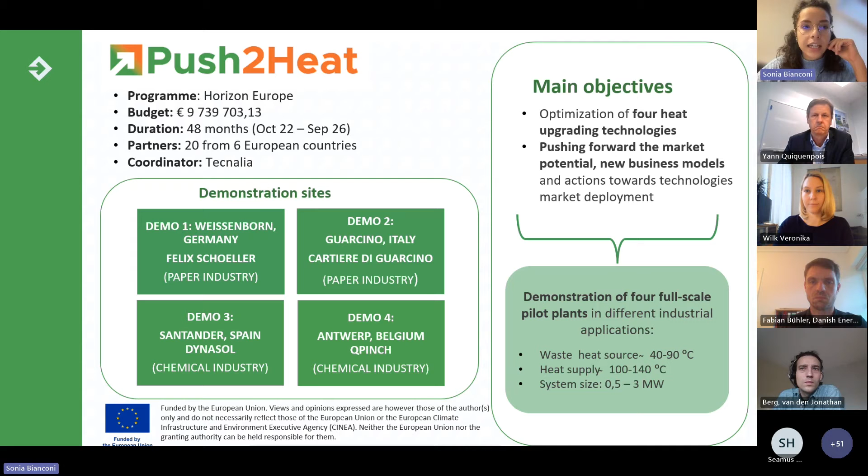I'm happy to tell you that this webinar has been organized under the framework of two Horizon Europe projects that aim to foster industrial heat pumps in Europe. These two are called Push2Heat and Spirit. They both kicked off last year, and EHPA is partner of these two projects. So we have Push2Heat, whose main objective is to push forward the deployment of industrial heat pumps at EU level, and it will do so by demonstrating four different technologies in four different demonstration sites, two in the paper industries and two in the chemical industries. It has a duration of 4 years, and it counts 20 partners from 6 European countries.

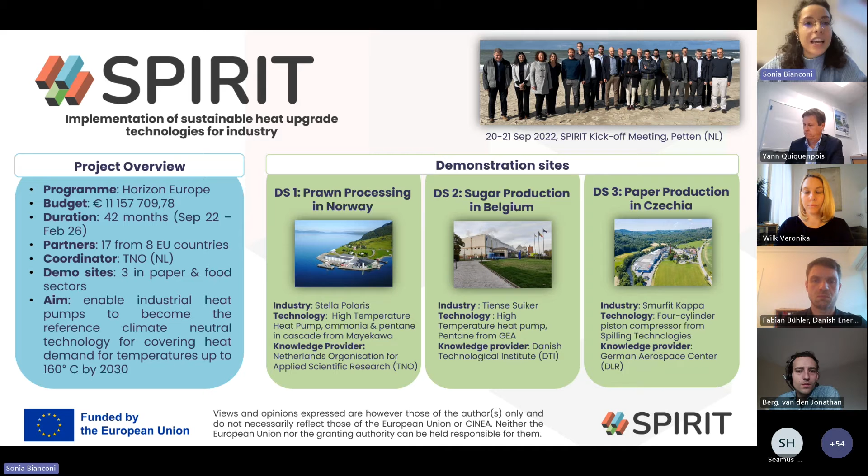And then we have Spirit, that stands for Implementation of Sustainable Heat Upgrade Technologies for Industry, and it kicked off as well in September last year in the beautiful beach of Petten in northern Netherlands. It has 3 demonstration sites, 1 prawn processing in Norway, 1 sugar production plant in Belgium, and a paper plant in Czech Republic. It counts 17 partners from 8 EU countries, and it is led by TNO.

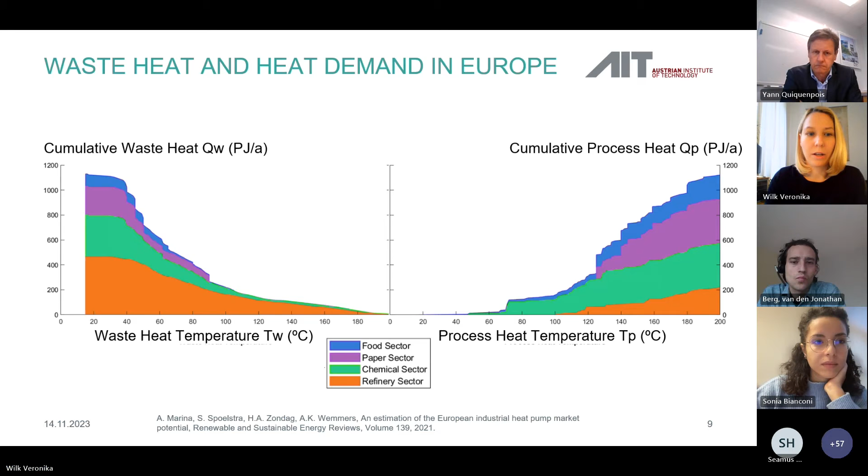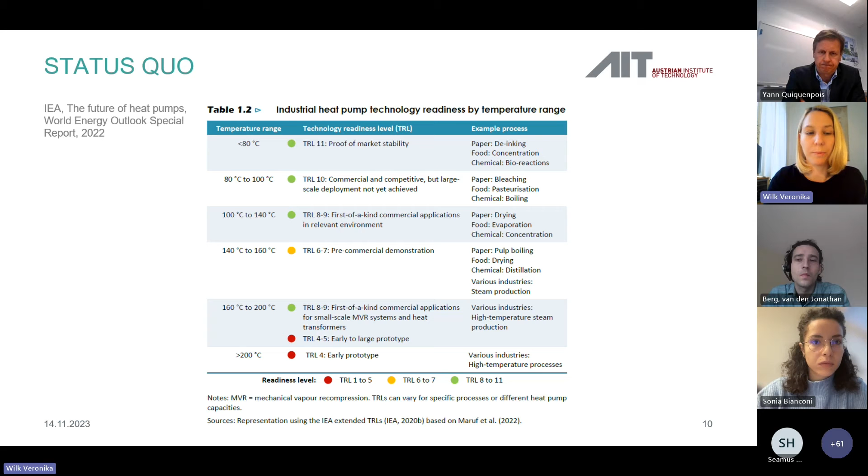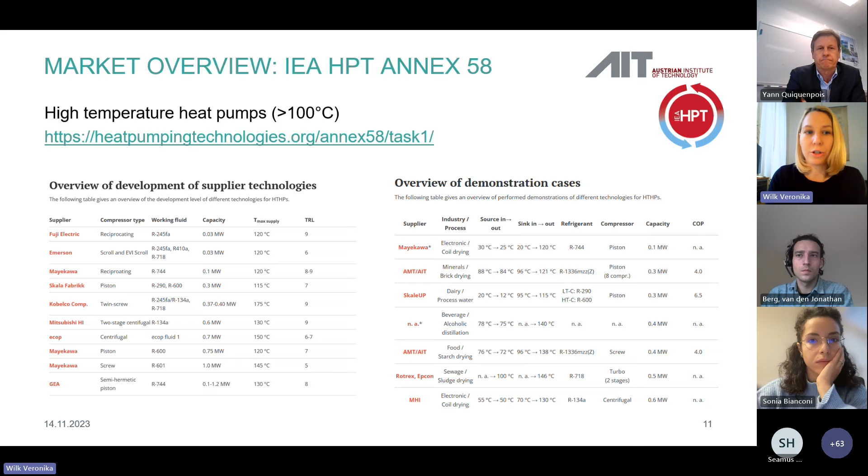If you want to know more about the heat pumps that are already available at the market, I can strongly recommend the website of an IEA project that's called Annex 58. It focuses on high temperature heat pumps, so heat pumps supplying more than 100 degrees C. And on this website, you find a list of suppliers, you find a list of demonstration cases, lots of information on the technology used, on the technology readiness level, on the refrigerant, the temperatures. So all the information that is needed to get a good overview on the technology.

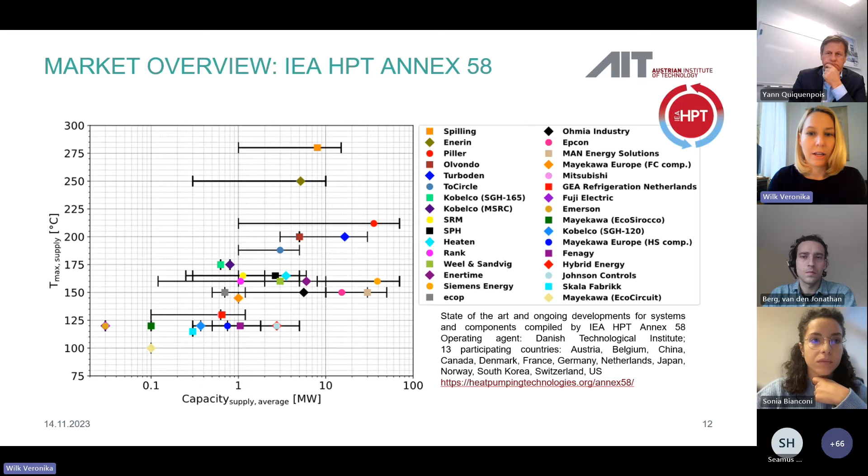Coming now to the barriers and opportunities concerning heat pumps, I want to start with a technical speciality of the heat pumps. It's a challenge, it might be a barrier, and it's the fact that the heat pump needs a heat source and a heat sink. So whenever we think of integrating heat pumps in an industrial process, we have to consider more than just the energy demand or the heat demand that we want to cover with that heat pump. We always have to look for a heat source where we can recover heat from, or where we can bring heat into this process in addition to the electricity that we need to run the compressor.

So this is an important difference compared to a traditional gas boiler that only needs the gas supply and the process that is supplied with the heat. And the integration of the heat pump is also decisive for the efficiency. So sometimes it's not easy to see at first glance what is the most suitable integration point for a heat pump. So this requires engineering knowledge, process knowledge. So basically said, we need skills here.

We need skilled people that can integrate and deploy all these heat pumps in industry that will be needed in the future. And this is now also addressed by a new action plan that the EU has launched, the Heat Pump Action Plan. It does not only cover industrial heat pumps, but also residential ones. But skills is an important topic in this plan.

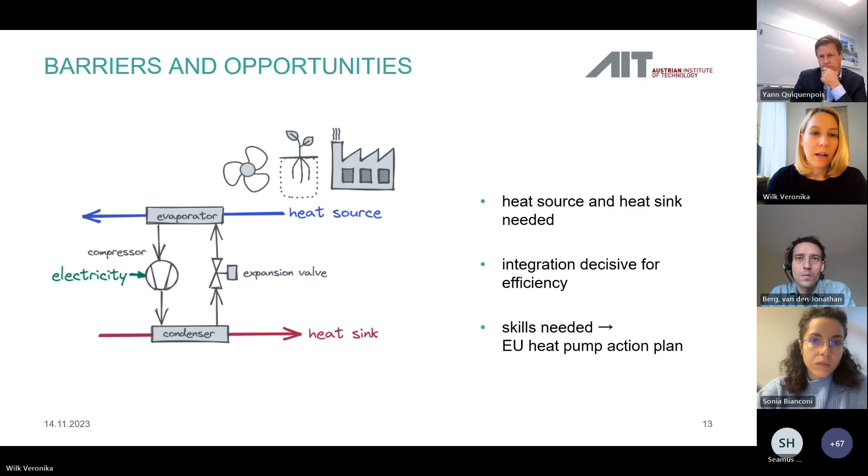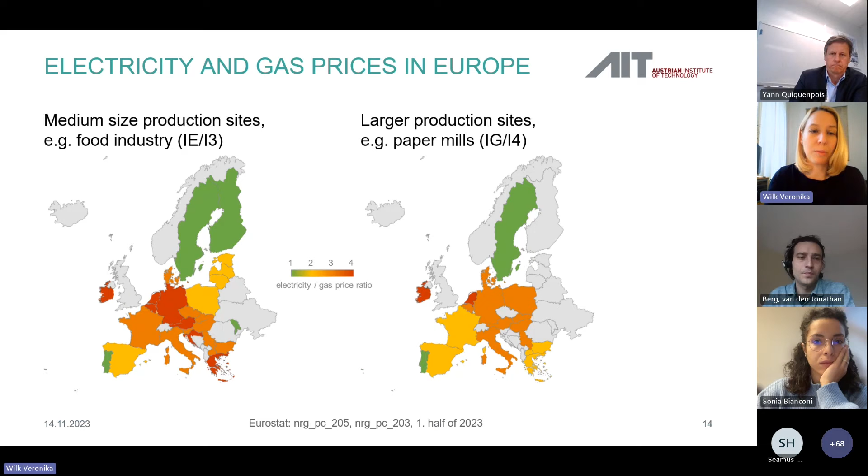And on the right, there is the situation for larger production sites, for example, paper mills that we find all over Europe. And there, the consumption bands are IG and I4. And when we compare these two landscapes, we find more yellow and orange countries for the large production sites. So this is an indicator that heat pumps are more economic there than for the medium size sites. So this is for the economic barrier. I think this is a very important aspect.

And I want to put this now in a bit of a broader perspective. So when we discuss decarbonisation, if we really want to achieve low CO2 emissions, we have different options to do that. It could either be a heat pump, but there are also other technologies that we can use for process heat supply. In this example, I have selected steam production up to 12 bar. And the different options that we have are the heat pumps, the use of biogas in an existing boiler, the use of an electric boiler, or the use of electricity to produce hydrogen in an electrolyzer and then use it in a hydrogen boiler.

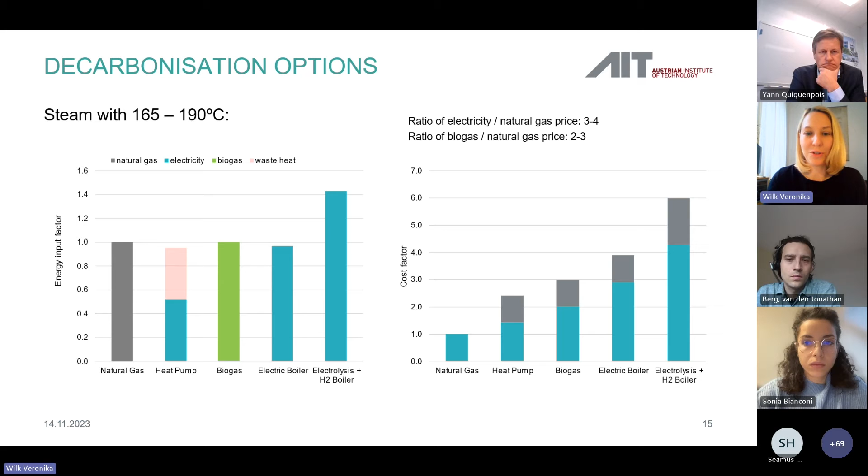And with these two pictures, I'm already at the end of my presentation, and I want to summarize the points that I think are most important.

Heat pumps are a very interesting and also future-proof technology for process heat supply because they allow for the reduction of CO2 emissions and increase in energy efficiency. With a heat pump, we can electrify process heat supply, and we can recover waste heat, which is already available at the site. Of course, integration is decisive to get to an efficient solution, and it's also a very dynamic environment. So there's lots of ongoing development.

We will see more and more manufacturers and products entering the market, higher temperatures, steam generation. So this is definitely a technology which will be widespread in the future.

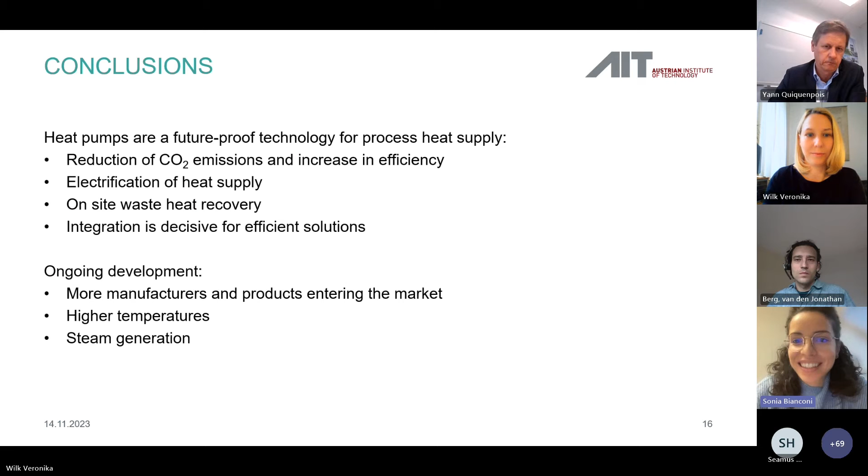Thanks a lot, Veronika, for giving us the European perspective. I think that this lays the basis for the next speakers that are going to follow. Because today we're going to hear the perspectives of different EU countries on industrial heat pumps and what is going on in terms of incentives, but also in terms of the challenges in different EU countries. And the first one is France. We are going to hear the French case from Yann Quiquenpois from Daikin France.

Yann has been working for Daikin France for the last 7 years on industrial heat pump chillers, but he has 36 years of experience in applied and refrigeration business. And he has been senior sales engineer at Mayekawa and regional director at GEA and also at Lennox. And of course, many other experiences that are not fitting today in this very short time that we have. But Yann, if you want to complete your bio, please do. And of course, the floor is yours.

Okay, thank you very much, Sonia. Good morning, everyone. I will take the control on the presentation, I suppose it is possible.

Yes, perfect. Very good. Okay, so to start today, I really want to give you some feedback concerning the French market perspective, especially towards the industrial heat pump. And of course, with a short time, it's very difficult to speak about a lot of topics we can raise today. But the first thing will be to have some details concerning drivers and barriers as an introduction.

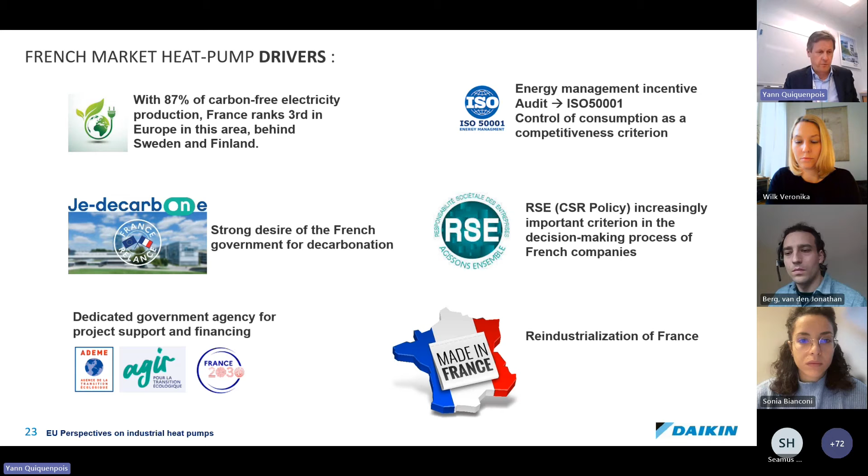Another point is really also important concerning the heat pump market. This is what we call the RSE and the CSR policy, because most of the time in France, concerning the possibility to recruit good skills and good candidates as future collaborators, they are really interested and focused on the RSE policy of the company. And more and more, we can consider that made in France is really important.

The second page concerns the barriers, because of course, as I already mentioned, one of the main barriers to promote this kind of technology comes from the skills requirement, especially for maintenance and installation. Because even if we can promote very good solutions, we need to take care this solution is implemented for the long term. For that, we need to really have the specialists.

And for the moment, we have a lack of specialists in the French market. This is a fact, and we also need to push the government to promote this kind of heat pump solution and to take care of new training for new people.

Another barrier comes from the F-gas regulation, except for natural gases, and this is one of the opportunities. But for the moment, we also need to take care of the reality of the market and the reality of the demand, and much of the demand still continues to use HFC. HFC concerns the direct emissions, not the indirect emissions, and sometimes natural gases cannot reach the same efficiencies, or only with more complex systems.

Concerning the incentives, we also have some issues to improve, because for the moment, when we consider, for example, the cooling process only, with chillers plus heat recovery, this more or less looks like a heat pump, but it cannot be supported by the subsidy. Therefore, you receive less money for a more efficient system. I will return to this point later. And as already mentioned by the previous

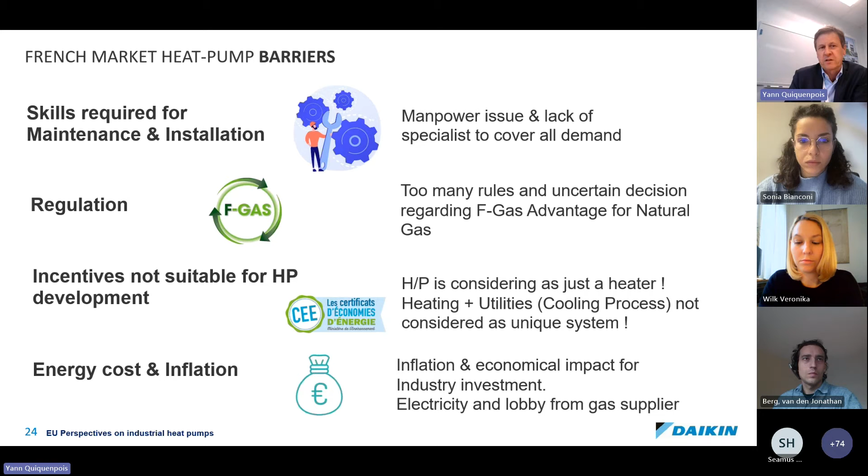presenter, this is a matter of energy costs, and we have a very strong lobby from the gas suppliers in France, especially because there is a very big company. And also in Europe there is a link between the price of gas and electricity, especially at this moment; this is one of the topics pushed by the French government. The inflation is also important because it directly impacts industrial investments.

Okay, the next topic is decarbonization. I won't read everything, just the most important. On the 8th of November, our economy minister, Mr. Bruno Le Maire, announced a very strong engagement with 15 clear decisions to push decarbonization in France. Concerning the heat pump, 2 decisions are very important.

The first is decision number 6, supporting green technology, especially the topic called green industry. The main decision concerns how to compete with fossil energy through other systems like solar panels, wind turbines and so on, but also heat pumps and carbon-free hydrogen. For these solutions, the decision was to implement a tax incentive system called C3IV, in French Crédit d'Impôt Investissement Industrie Verte. The most important point is to reduce and support the capex for production, supporting the investment from 20 to 45% with a budget of €500 million.

Decision 7 is how to put industry in front on greenhouse gas emissions, because we have a plan in France called SNBC, Stratégie Nationale Bas-Carbone, the national low carbon strategy. What we expect is for 2030 a 25% reduction, and 81% by 2050. For this one, the most important thing is the subsidy: 5.6 billion a year for the major plants, and also 2 to 3 million euros for the small companies. This is also an important topic to sustain the heat pump in industry.

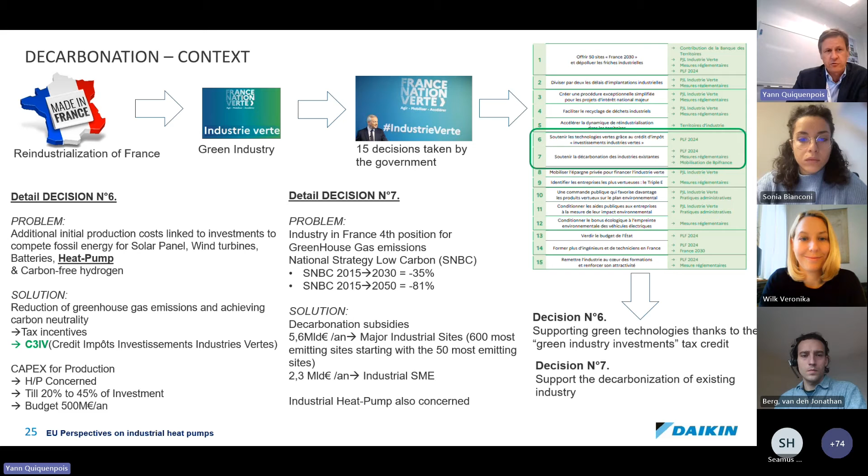Concerning decarbonization, going a little more into detail, we also need to consider the energy consumption in industry, which is very huge in France, representing 471 terawatt-hours, where more or less half is used only for heating needs. We can also consider the electricity needs. Here the heat pump mainly covers heating needs below 150 degrees. You see the scale of the different temperature categories and needs, but most of the time the heat pump is used below 150 degrees. Even if some systems could reach higher temperatures, it is important to concentrate where we have the biggest perspective for improvement.

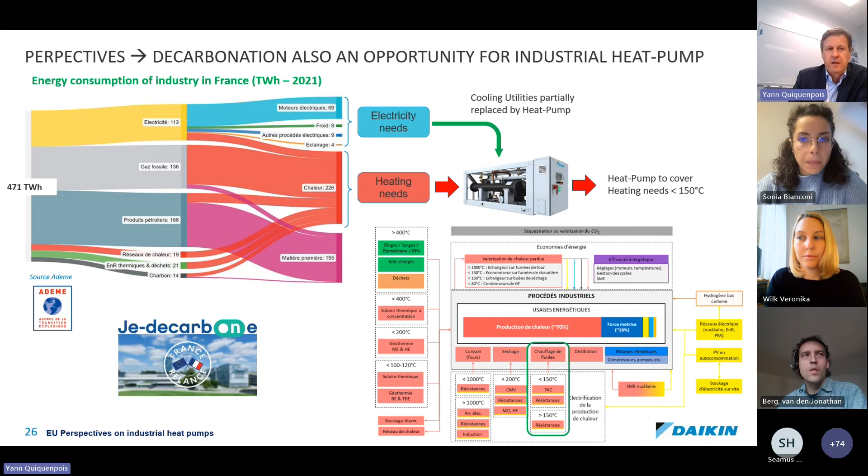The next point is what we call the Fonds Chaleur. The Fonds Chaleur is a system implemented in France as a driver to sustain big projects linked with waste heat recovery. For this one, we can receive 30% support and subsidy. And when the project can cover renewable energy, the support of this fund can increase. This fund is mainly focused on three topics: efficiency, how to recover the energy, and renewable energy.

But the most important focus is on waste energy, sustaining projects where we can share the recovered energy directly on site or in the nearest area, to be sure to avoid and reduce the waste heat. This is also important because to achieve this kind of system, the heat pump has some added value.

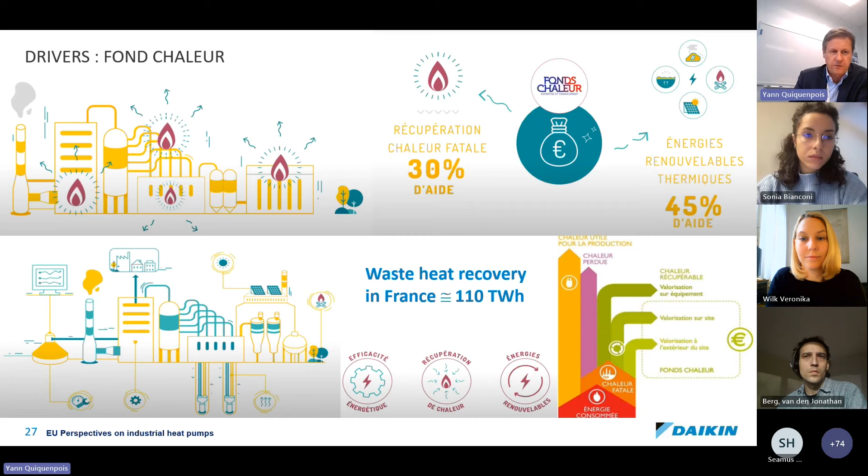Concerning the next topics, I'm not here just to make a training on the heat pump, but what is also important in France is to consider: sometimes when we speak about heating, we speak only about heating production. But in the end, if we consider the chiller with heat recovery, the heat pump, and the thermofrigo pump, this is exactly the same machine. The same machine using what we call energy transfer, using carbon-free electricity.

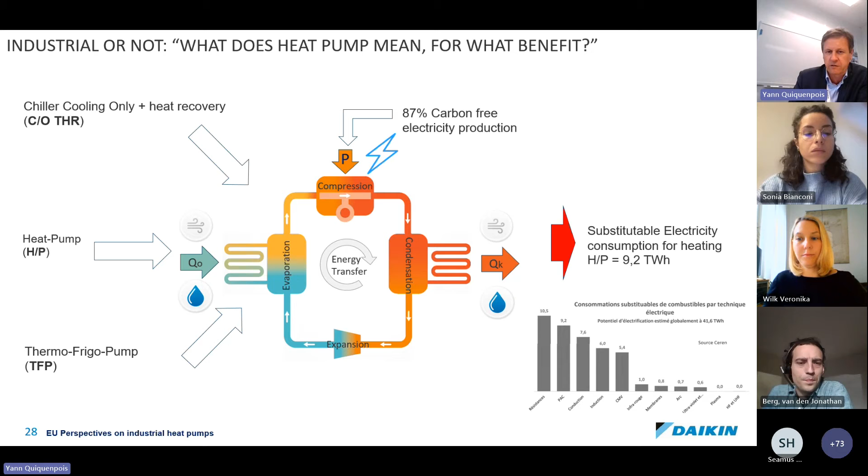And like that, we can move energy from one level to another level, and we can count for the heat pump, especially for heating consumption, to reach 9.2 terawatt-hours. This is mentioned by a study in France. This is what we need to concentrate on: which kind of benefits we can reach with this kind of technology.

If we go a little bit more into the detail, this looks similar to the previous presenter. We can analyze what the need is in France in terms of opportunity based on temperature. Of course, we have the cooling. In this case, we are concentrated on the heat recovery. This one is already covered by some systems. And we also need to consider hot water, and for that we can continue to use air-cooled heat pump systems, and we can start to use geothermal probes, especially at the surface.

For higher temperatures, like more than 80 degrees, and could be 90, we can use a different, more complex system with a cascade, air to water, with water to water, and so on. But for that, we need to consider that the capex and also the opex will be a bit higher. This is the reason we really need the support of the government, because when we consider deep geothermal energy or waste heat, the system becomes more complex. And if you want to produce steam, the capex increases a lot.

This is the reason that for the moment, it's also important to consider the different technologies. Mature technology already exists and is immediately suitable. And for the moment, these are more or less the cases we can find on the market. This is the right direction for sure. But for the moment, I repeat again, this is also a matter of skills.

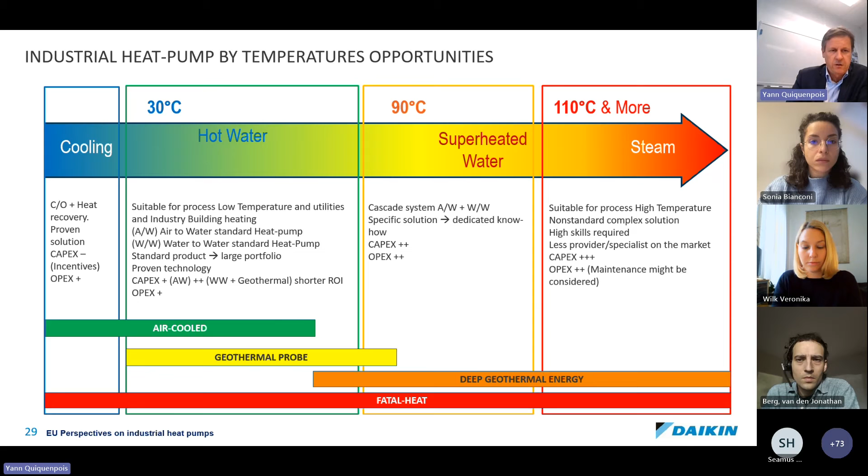Concerning the barriers, another example, this is very strange: in France we have an incentive from the Ministry of Ecological Transition for heat recovery systems. The purpose of this tool is that when you recover energy, you receive a subsidy. But this is very strange because if you consider a cooling system plus heat recovery, you receive the money. But if you consider the heat pump, you don't receive the money. This is one of the barriers we need to cross, because in the end, this is exactly the same system. Or worse, the more energy you spend, the more money you receive. This is totally opposite to what we want to achieve.

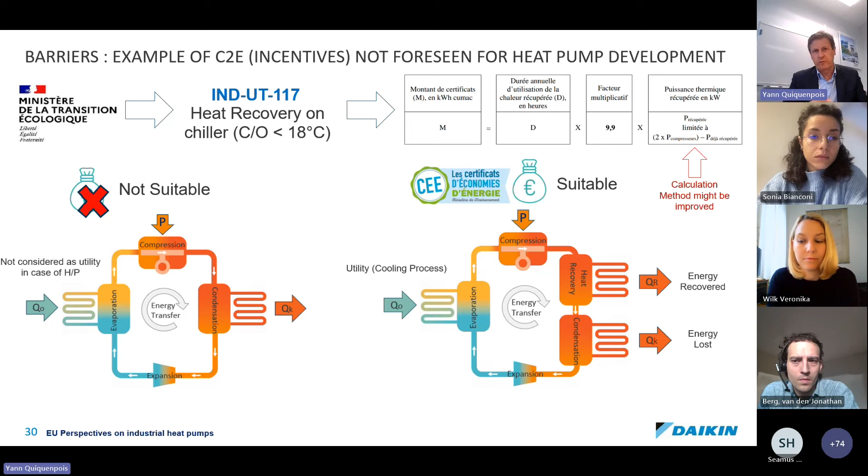If we go a little bit into the details, just for your information, this is really important because for any kind of thermodynamic system, we use the same diagram. This is an enthalpy diagram, meaning the relation between energy consumption and energy transfer. On this part we have the cooling of the system, and on this one we have the heat recovery.

The most important thing to understand is if we consider tools using only the capacity and the absorbed power. In this case, you can see even if you increase the temperature, of course, you increase the capacity in terms of enthalpy, you increase the heating capacity, but in the end you also increase the energy spent to run the system. If you make a very simple comparison, you can see, okay, I increase the capacity, but if I increase the absorbed power at the same time, finally I'm reducing the COP and the efficiency of the system.

And to promote the heat pump, it would be interesting to change this kind of incentive system and to consider a global COP. Global COP means for the same energy consumption, you can produce heating and cooling. And therefore, finally, your global COP is much, much better to prove or to sustain the energy saving.

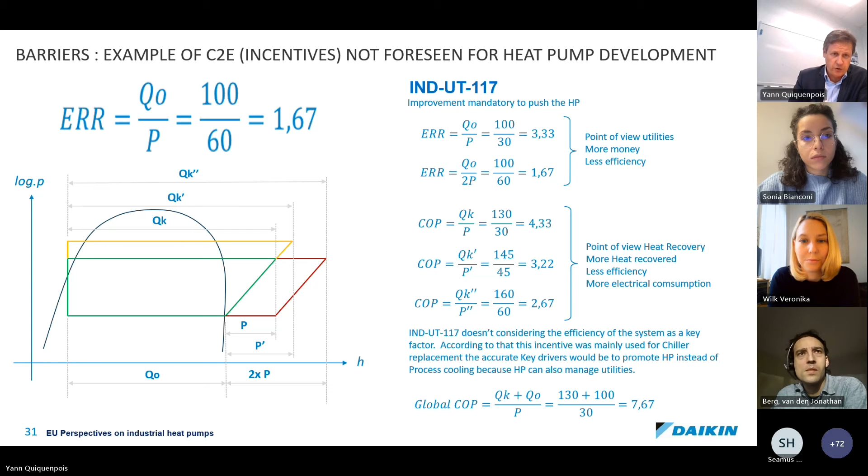But the problem, if you consider what is the reality, in the meantime we will continue to use some F-gas in some other solutions, so we cannot sustain the system. And another point concerning the F-gas, this is also important to consider: if you want to move toward another type of refrigerant gas, you also need to consider the flammability of the system and also the toxicity of the system. This means you need to train the people. This is achievable, but you really need to train the people to sustain the possibility to have the market.

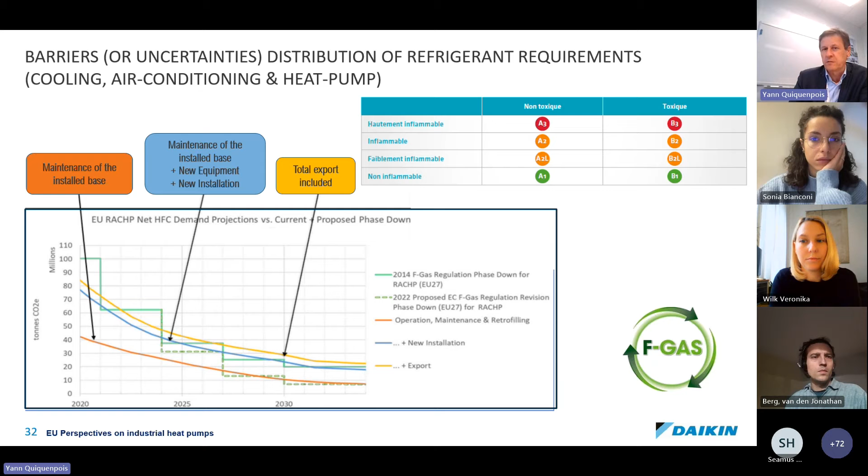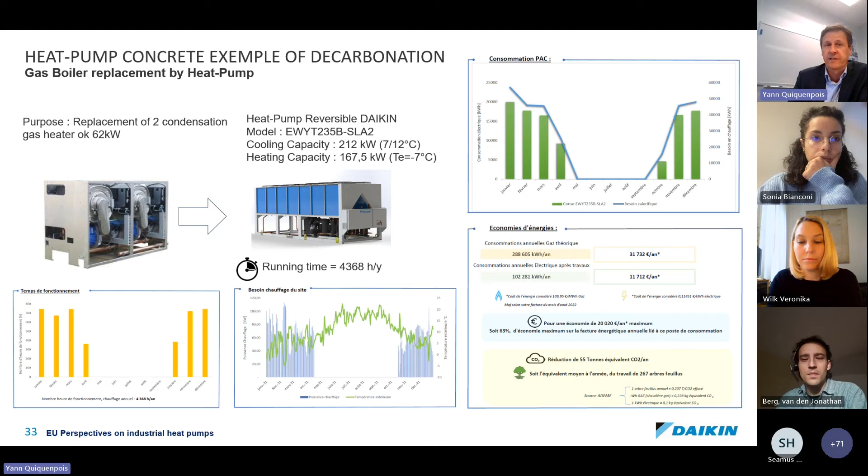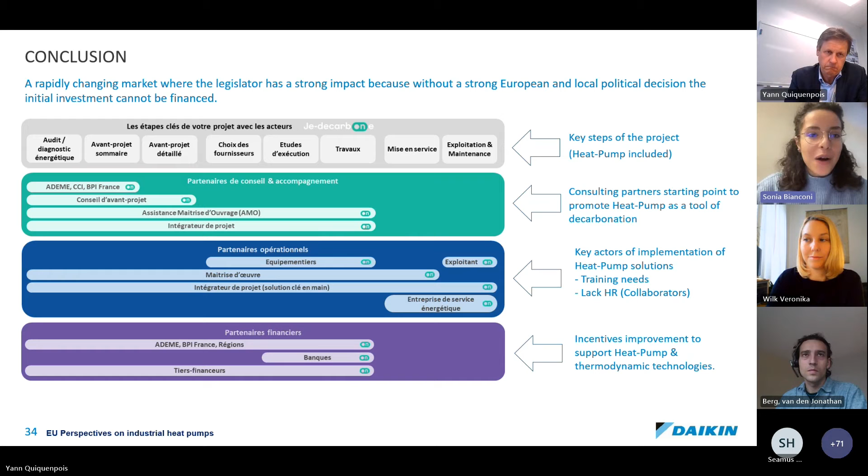Now we are going to hear about the Dutch case from Jonathan van den Berg, and he's going to give us a presentation on heat pumps in the SDE++. Let's see what this means: a premium subsidy scheme for the Dutch energy transition.

But first, a few words about Jonathan. He is a sustainable energy researcher at the Netherlands Environmental Assessment Agency. After obtaining a master's degree and PhD in nuclear fusion, he turned his career towards policy advice. He's currently working on the electrification options in the SDE++ subsidy scheme, and this includes various applications of industrial heat pumps. So let's hear this, Jonathan. The floor is yours.

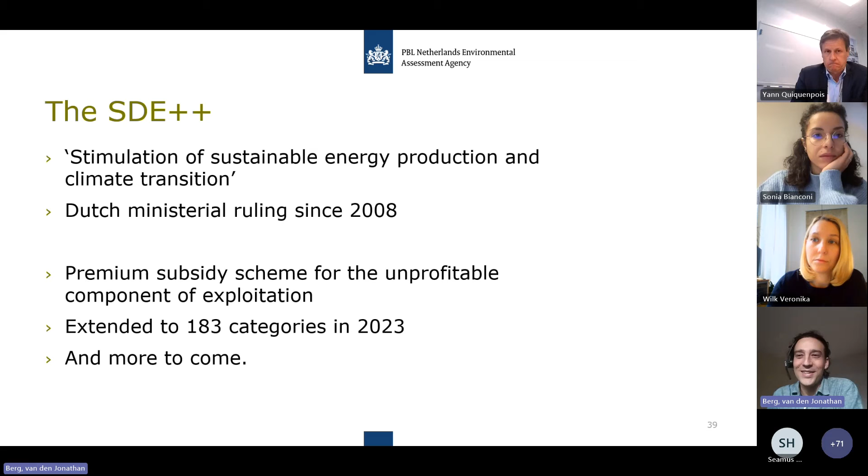Okay, the SDE++, that stands in Dutch for the stimulation of sustainable energy production and climate transition. It is a Dutch ministerial ruling that has been in force since 2008. And it's an exploitation subsidy, so a premium subsidy scheme for the unprofitable component of exploitation. And it includes many different categories. In total, in the last round of this subsidy, there were 183 categories to choose from. So something for everybody in the energy transition, I would like to say, and there are even more to come.

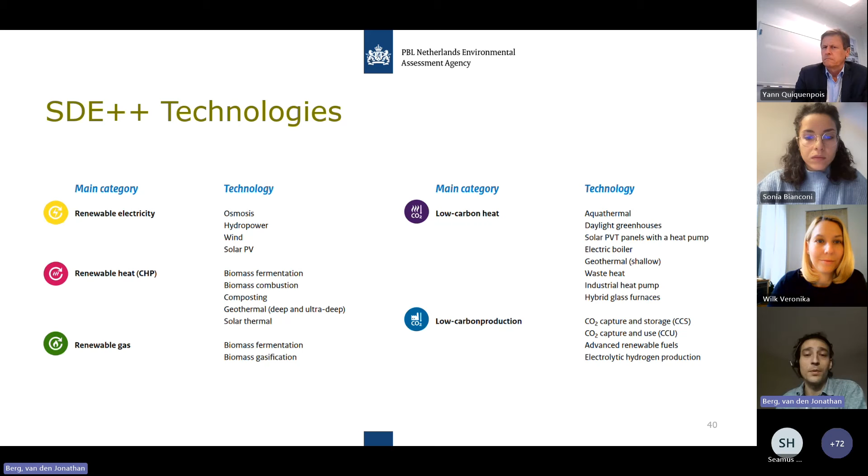So what kind of technologies does this subsidy cover? Well, we have renewable electricity, renewable heat, renewable gas, low carbon heat. That will be the one that we will be discussing because it covers also the industrial heat pumps, and also low carbon production, for example, carbon storage and utilization.

Okay, so how does this subsidy work? Well, we want to cover the unprofitable component. So in the end, the subsidy that is provided is given by an application amount that is determined at the moment of application, minus an annual correction amount. And this correction amount includes the market profits for the produced goods. And also it includes the ETS advantages that a company might have when they move to a sustainable technology. They might save on ETS costs. And so this subsidy is a subsidy on top of the ETS system to accelerate the transition, basically.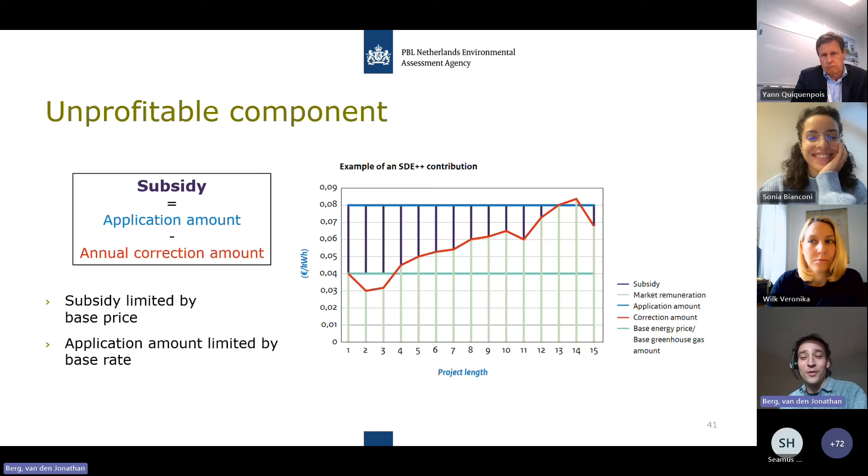So that is the goal for us at the PBL, to look at all these technologies and determine the exactly adequate base rates for each of the technologies. And for that we use the methodology of the levelized cost of energy.

And yeah, not all the technologies can be just simply included. A category in the SDE has to have a few ingredients. So there are a number of requirements. You need a defined technology, a measurable quantity of production, which can be tricky sometimes. You need a known production capacity. The costs of production must be known for us to make a good advice, of course. And also the resulting emission reduction is an important component, of course.

And we make a yearly advice for that. And an important part of that is that we also have consultation with market parties and trade associations, just to listen every year what should be changed and what troubles the parties are experiencing, and what can we do with that in the new subsidy round.

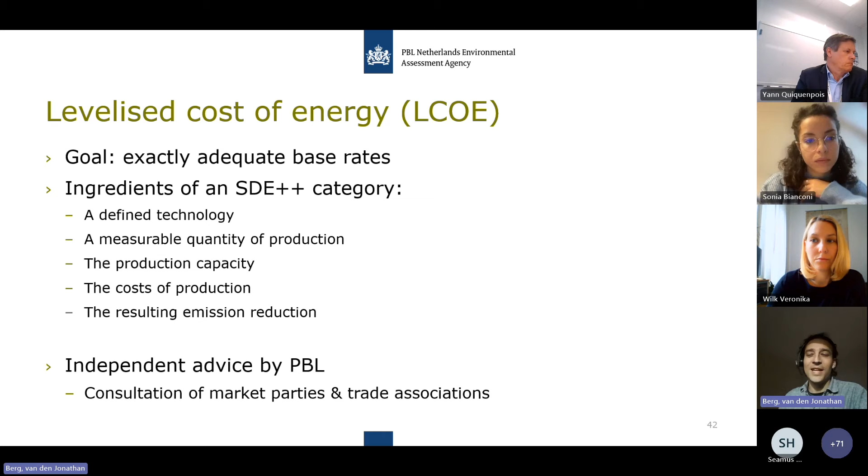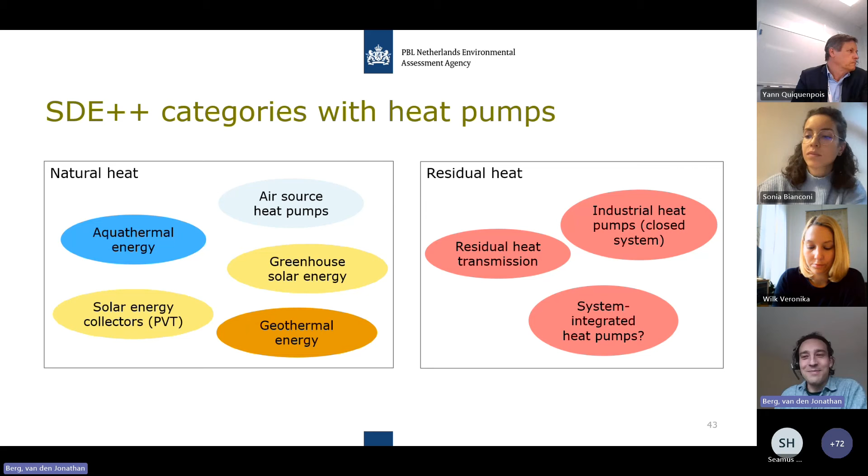Okay, now let's look at what this means for heat pumps. Indeed, there are quite a lot of heat pump categories already in the subsidy. And we have heat pumps which use natural heat as a heat source, and also residual heat. And on the natural heat, we have aquathermal energy, greenhouse energy, geothermal energy, etc. But the technologies that I am working on mostly are the industrial heat pumps, which use residual heat. And also, we are now working on this new category, the system integrated heat pumps, which is still work in progress.

Okay, so this industrial heat pump, how does this look in the SDE++? Does this qualify? Let's take a look. Now here we see a schematic of a closed system heat pump with the heat source being residual heat. In the evaporator, that heat is proceeding towards a compressor that uses electricity and then fed into a certain process. So yeah, this is quite a well-defined technology. As you have discussed, the TRL level for lower temperatures, up to 90, is like TRL 9. So this works quite well.

We know about it. Also, we can have a measurable quantity of production because the heat output is given by the delta T on the hot side times the mass flow on that hot side. That's things you can measure very easily and record. Well, the production capacity is also known: if you assume that there's a continuous process in industry, then you can count with maybe 8,000 full load hours.

The production cost is something that we can determine. We determine that from the applications from previous years. It gives us a very nice overview, and also from the consultation for the investment cost, the maintenance cost, and the electricity. And there we can use an average COP of 3.5.

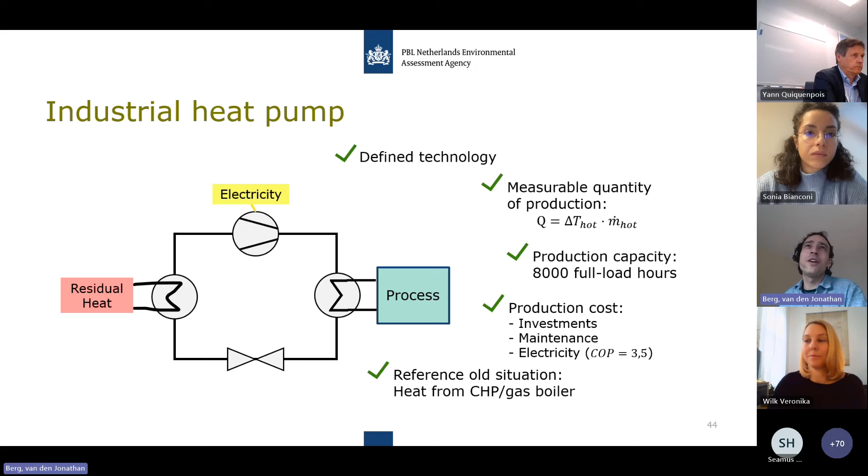Well, the reference situation was that there was heat from a CHP or gas boiler, so that is also well known. And with this COP of 3.5, if you look at your own case, you might see, well, that's not exactly the same. And yes, that's also one of the limitations. We make this subsidy, we try to make it fit for most of the projects, but not all of the projects. And with heat pumps, we know that there is actually quite a large variation in investment costs.

Depending on the temperature gap, a large temperature gap might mean a more expensive heat pump, or also the integration costs might vary. There's also variation in full load hours. For example, companies that are running 5 days a week or only part of the year. We are discussing only the industrial heat pumps here, so no heating systems for residential heating or something. But we found that if a certain company has a small amount of full load hours, their exploitation is not fully covered because they can only receive subsidy for a smaller number of hours. Therefore, we had to add an extra category for 3,000 full load hours.

Also, there's a variation in the COP, depending on the temperature gap. And when you have a very small COP, you need a lot of electricity, so your exploitation might not be fully covered with this subsidy. But if you have a very high COP, then you might not even need any subsidy. So we have also made a limitation for COP below 10. Okay, so finally, this works. There are limitations, but every year we have applications.

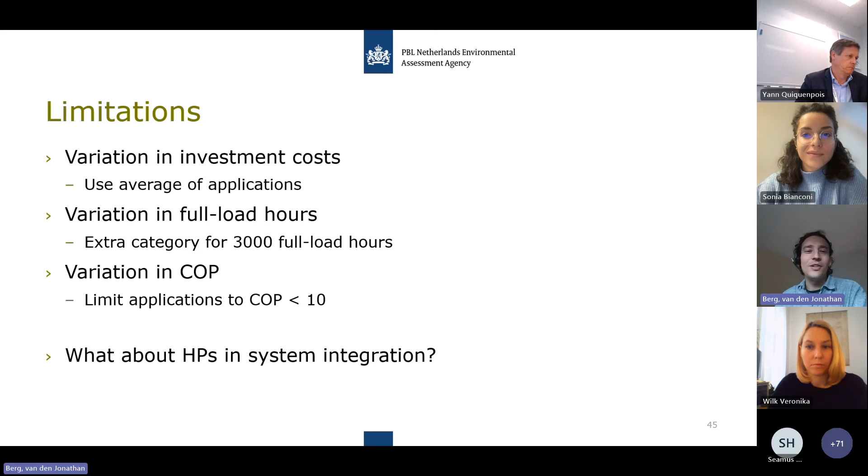But what about heat pumps in system integration? And then especially we are considering heat pumps in evaporation systems. So that might include evaporation systems in the food industry or chemical industry, or also paper mills. Steam rolling systems. And this is a different type of heat pump. It's an open system where there is an evaporation process and it requires heat in the form of steam. Then this evaporation heat, the process heat, exits as latent heat.

And in the previous situation, it has often been used for a multi-stage evaporation system, or it's high-value heat. But what can you still do? You can reuse this heat with a compressor and put it back into the process. That is the technology that is described as mechanical vapor recompression. And that's a very nice situation, because it's energy efficient. The temperature gap is quite small, and the COP is very large.

So, okay, you think that, according to our requirements, this system might not need any subsidy. But nevertheless, we have received a lot of complaints or feedback from market companies that this does not work. And there was even a parliamentary resolution passed in the Netherlands that said there should be a better subsidy scheme for these types of systems. So what is the problem here?

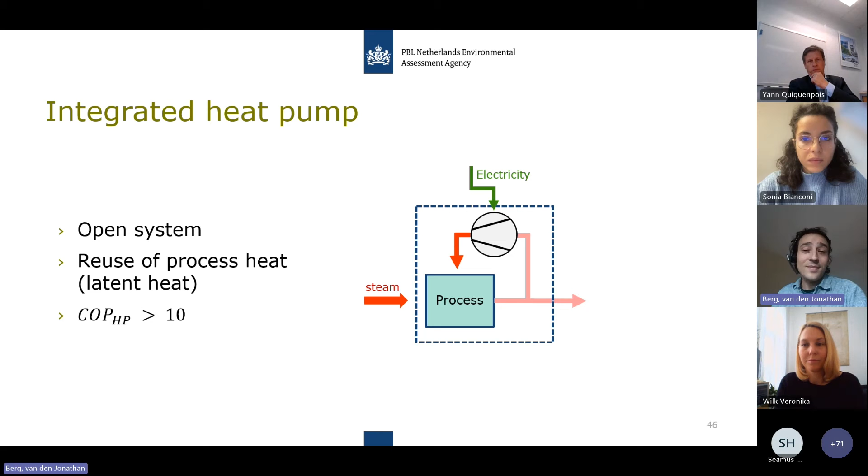Well, the problem is that in our previous category, we had accounted that the heat source of the heat pump was waste heat that had no value. But this heat source actually is quite valuable. It's a high temperature heat. So we have to do something about it, and we try to get on with this and make a new category. So how does that then work?

Now, we have again the requirements. Is this a defined technology? It's okay. It's a heat pump in an evaporation process. There are quite a lot of different technologies that can apply for this, steam rolls or evaporation systems in the food industry. But we say, okay, that's fine. Now, what's the old situation? The reference case is that steam was used, but okay, that's a little bit difficult actually.

But what is the measurable quantity of production? This was quite a challenge for us, because you would normally like to use the heat output of the heat pump as the quantity of production, but that simply is not good enough for these high temperature heat pumps. And I think the previous speaker also commented a little bit on this. Because you should not only consider the output, but also what this heat pump does to the other heat stream. It also takes away high value heat.

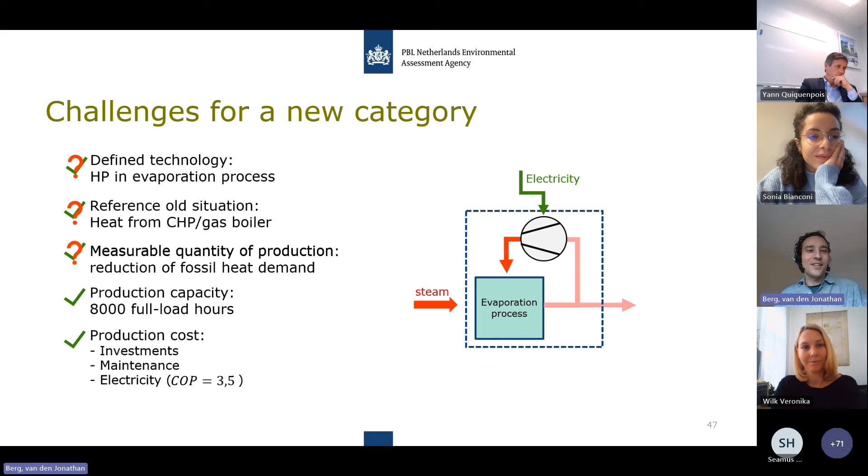So we decided that the only way to go is that the quantity of production is actually the reduction of fossil heat demand of the total system. The production capacity is the same as for the other systems, and for the production costs we have a similar approach. And we actually come to the same COP for these types of systems as for normal heat pumps. Why is that? I have to skip a few things here. Because the reduction of fossil heat demand is technically a very similar approach to a normal COP.

So we have the heat reduction coefficient, given by the expected reduction of fossil heat demand divided by the electric power. And you might recognize this from a normal COP of a heat pump, the thermal output divided by the electric power. Technically that is maybe the same, but for the Ministry of Economic Affairs there's a quite important difference. For them, the thermal output counts as production. They want to support production in a renewable way.

But when we look at a reduction of fossil heat demand, that is more like an efficiency measure, and it's a little bit difficult for the ministry to consider that in the same way, although technically you can say it's the same. So we are still discussing this with the ministry, and we are working on our advice. Hopefully this will become a new category, but we are not sure yet. And those are some of the challenges.

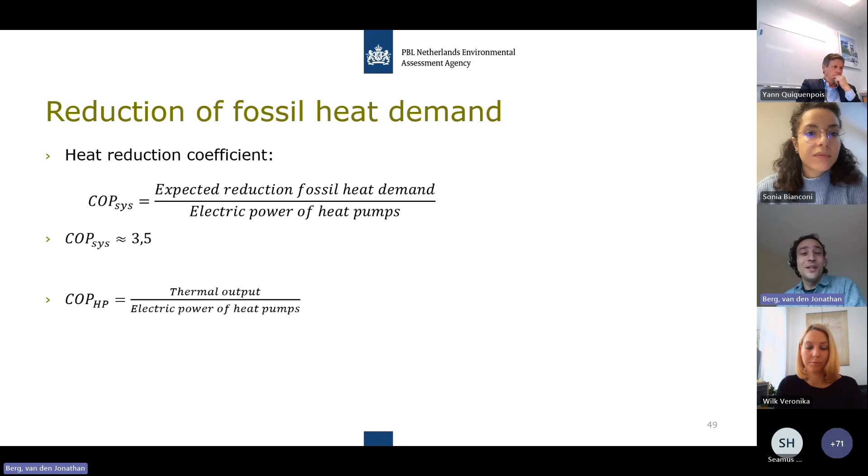So that brings me to the takeaways. The SDE subsidy aims to kickstart the energy transition with some subsidies. But as we add more categories, it becomes even more difficult to add those. There are more complications, and they are not only technical complications, how we should calculate this, but sometimes also political complications. What does this mean for the political system? So that's what we are working on. We are making some progress, but there's still a lot of potential to unlock.

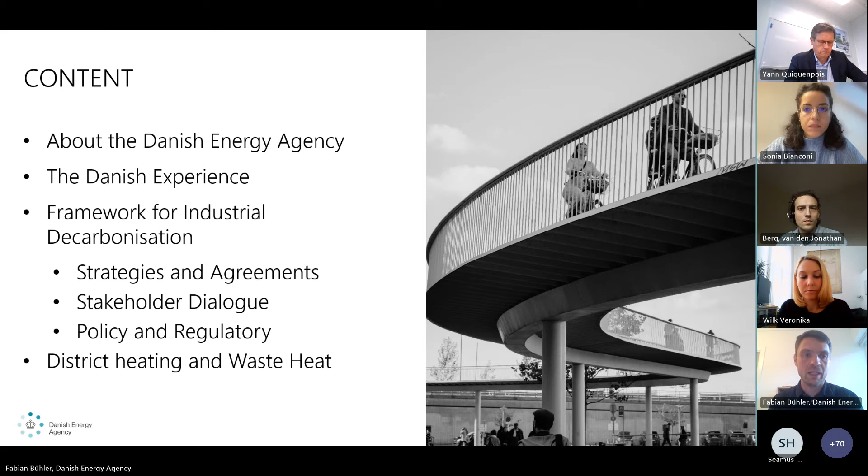To start with, to give you a very brief introduction to the Danish Energy Agency, we are a government agency under the Ministry of Climate, Energy and Utilities. And we are in charge of the green transition of the Danish energy system. We work with all aspects of the Danish energy system. We were recently restructured to represent the new challenges which are coming in the green transition in Denmark. For example, a Center for Electrification was created, which includes a green industry transition team, and also electric transport.

We have a team for green utilities, which looks at power plants and how they can be converted to biomass and biogas, but also taking care of all the wind power being built in the North Sea and Baltic Sea at the moment. I'm located at the Center for Global Cooperation, where we have government-to-government collaborations with 22 countries around the world, where we advise on the Danish green transition.

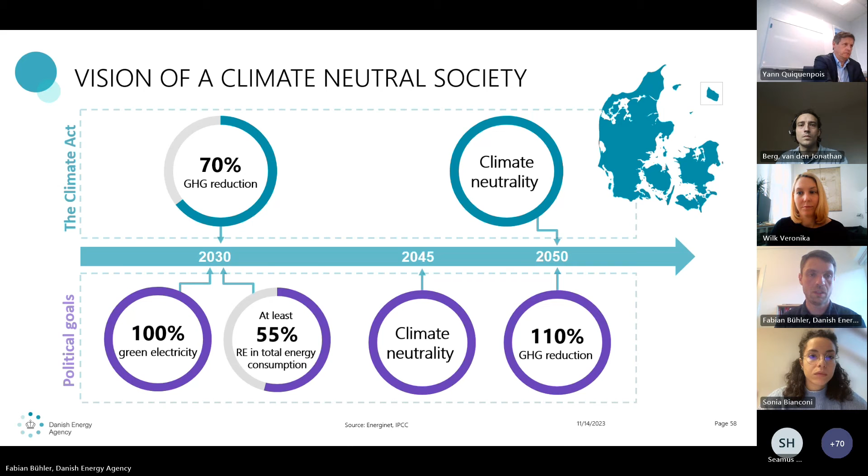Yes, so much to the introduction to the Danish Energy Agency. I would like to give you some experiences we have in the industry sector. And I think one good case is the Danish dairy industry sector, which accounts for a lot of the energy use in the Danish industry, but it's also a very economically important sector in Denmark.

Due to the energy crisis in the 60s and 70s, the shift was in Denmark to move away from fuel oil to, for example, natural gas to become more independent of fuel oil and to use natural gas from the North Sea, which also happened in the dairies, which converted from fuel oil to natural gas throughout the 70s, 80s, and 90s. And today we are in a situation where all the thermal energy demand is covered by primarily natural gas and an increasing share of biofuel and biogas in the last 5 to 10 years.

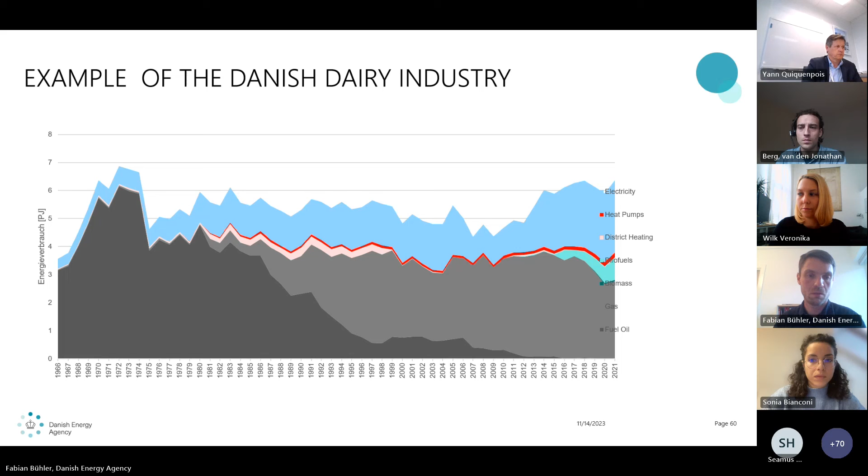And that's because in the Danish dairy industry, a lot of energy efficiency efforts were made in the beginning of the 2000s due to several energy efficiency obligation schemes and voluntary agreement schemes in place, which supported energy efficiency, which reduced energy consumption. Greenhouse gas intensity continued to decrease because we have decarbonized the overall energy system, meaning electricity has become greener, and thereby scope 2 greenhouse gas emissions in the dairy industry have continued decreasing.

Overall, since the 1970s, energy use in the Danish food industry was reduced by 32%, while production value increased by more than 60%. And here in the food industry, we have not seen any structural changes, unlike in the overall industry, where a lot of the steel industry has moved abroad from Denmark. In the future, the aim is to continue the work on energy efficiency, but focus more on the shift towards electricity. And I saw a question: KR is an abbreviation for Danish krone, the currency in Denmark. And that's the production value generated by the Danish dairy industry.

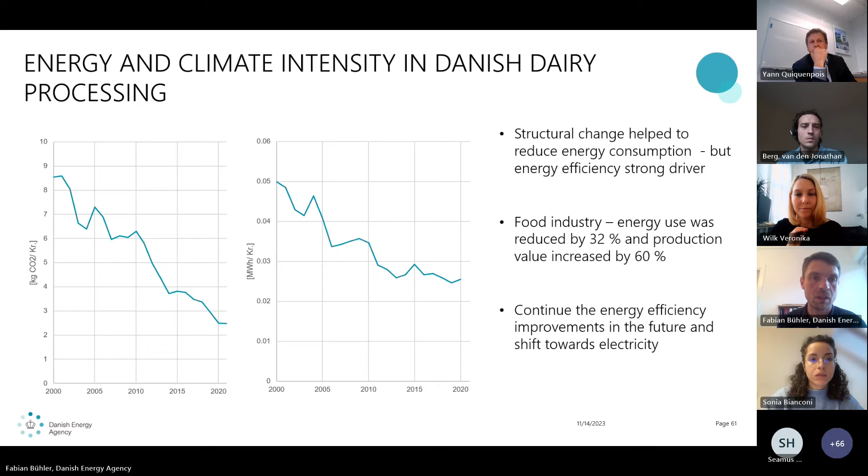Yes. Moving towards the energy policies in Denmark and the key elements of driving the green transition. We have three key elements that have supported the evolution of Danish energy policies over time, and they resulted in a very stable framework with some degree of flexibility. For one, there are cost-effective subsidy schemes which are evaluated on a regular basis to avoid over-subsidizing. Then we have energy taxes on fossil fuel, which make renewable energy more competitive and incentivize energy efficiency. And the revenues of these taxes are also used for research and development support.

There is a dialogue with stakeholders to ensure ambitious and realistic targets, as well as making sure that all the regulations are well functioning and efficient. So in short, what we have in Denmark is a combination of an effective state and the market. And I will introduce for the three circles some examples of what we do in Denmark.

So long-term energy strategies and agreements are quite important aspects. In Denmark, we have three major political agreements which dictate how we work with energy and climate targets. And they all also impact the industry in their green transition. So for example, the Danish Energy Agreement from 2018 defined that the electricity tax for electricity used for heating should be reduced. And it also implied that the excess heat tax applicable in Denmark should be revised. In addition, the Danish Energy Agreement also allocated substantial subsidy funds for energy-saving initiatives in industry.

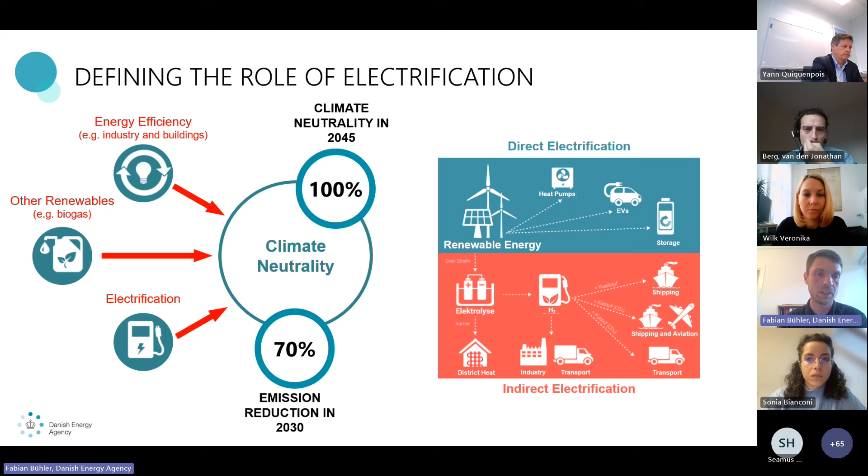And it's also, as part of the strategy, clearly defined how the green transition should happen. And this should happen through energy efficiency, use of other renewable fuels such as biogas, and electrification to reach climate neutrality by 2045. And here it's also clearly distinguished between direct electrification, which is the use of renewable energy in, for example, heat pumps, and indirect electrification, which is the use of renewable energy to produce hydrogen.

And we can see industry can, to a high degree, be directly electrified, and that's also due to the high share of low temperature process heating in the industrial energy use in Denmark. As mentioned before, food and beverage processing has a high share of the total energy use in industry. There's a small share of non-convertible emissions, and that's from, for example, cement production, process-related emissions, or high-temperature processes, which cannot be converted directly to electricity.

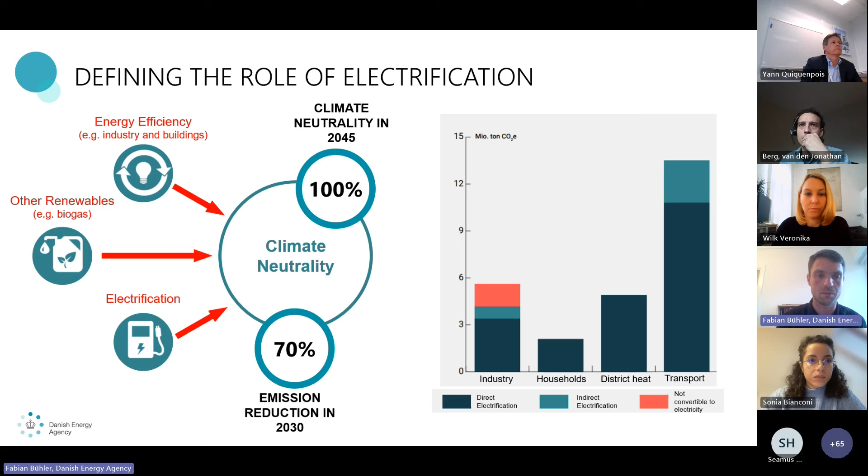Another element is the role of green gas in industry. And here it's also very specified where green gas should be used in the future. The aim is to phase out natural gas by 2030, and that's only possible through a reduction of gas demand and an increasing share of production of biogas in Denmark. And here there's also, if you want, a merit order that process heat for low temperature should reduce gas consumption continuously over the next 10 years.

While we see that process heat at a high temperature will actually increase their consumption due to the phase out of coal and pet coke in the coming years. And there we don't see a strong reduction in gas use.

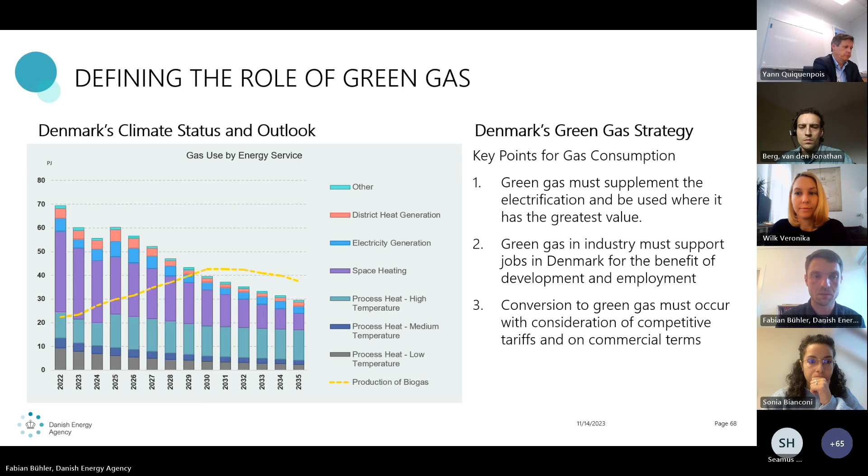Yes, I will just go very briefly into dialogue with stakeholders. In Denmark, we have established climate partnerships between the government and industry. There are 14 public-private climate partnerships, and they also include manufacturing activities. There's one for energy-intensive industry and food and agriculture. And the aim of these climate partnerships is that industry shows the way forward and gives concrete recommendations to the government on how they can obtain climate neutrality by 2045. And they come up with a roadmap.

Here's an example of the energy-intensive industry partnership, where they roadmap how they can reduce their emissions by 70% until 2030 with the baseline of 1990. And they divide all these options, for example, energy efficiency, shift of products, electrification, into technologies which are economically feasible for them today, some which will be in the future, and where there is government support required. And through this engagement with industry, we make sure that all the upcoming policies are in line with the requirements of the industry to perform the green transition.

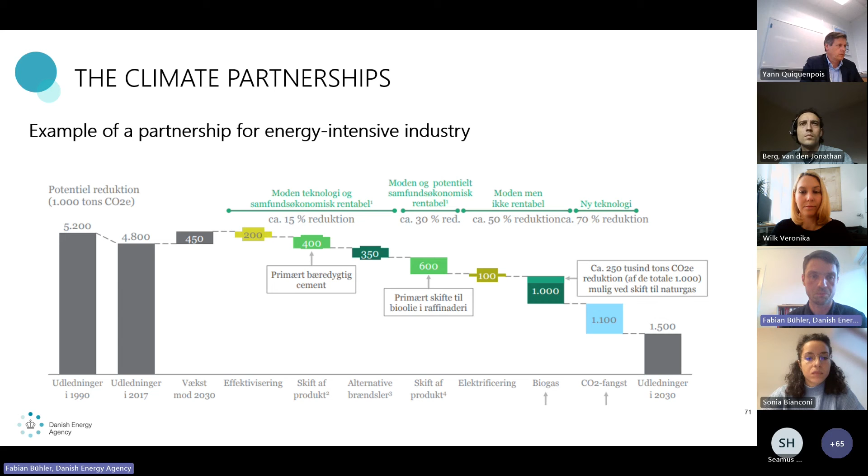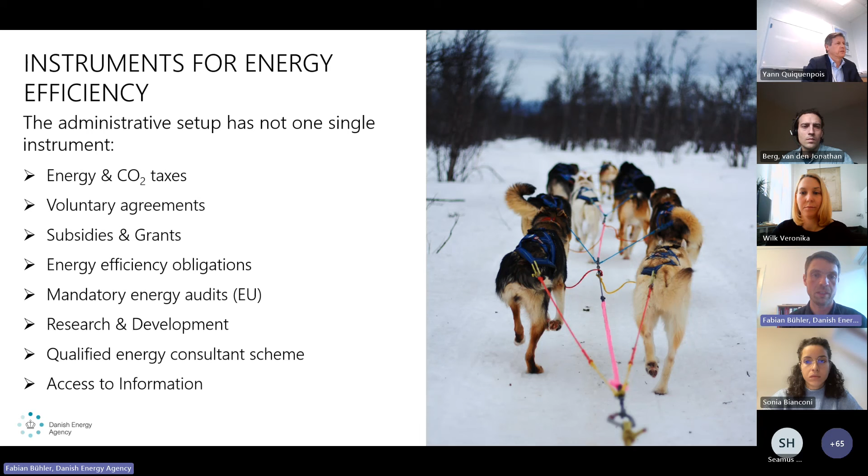Lastly, I will touch on the subsidy schemes and what we are doing in Denmark with regards to that. That's primarily anchored here at the Danish Energy Agency. One important aspect is that there's not only one instrument, not one setup which can drive the change we want to see, but it's important to have many different elements. And I can show you why and give you some examples. And here we can imagine the distribution of high temperature heat pumps, for example, for industrial processes.

There are different technologies, some with a very high carbon intensity, which would be a natural gas boiler or petcoke boiler, and some low carbon intensity technologies such as heat pumps operating on renewable electricity. And to drive this process heat supply to these low carbon intensity technologies, we have different elements to shape this curve. We can have standards and bans on the high carbon intensity technologies.

In Denmark, for example, we have a phase out of petroleum coke from 2025 onwards, which will ban combustion of these fuels in industry. We have taxes to make it more feasible for industries to use low carbon intensity technologies for process heating. And we have research and development support to make the low carbon intensity technologies more efficient, cheaper. And then we provide subsidies for the first industries to move towards these technologies, to create a market for these technologies and create acceptance for industry.

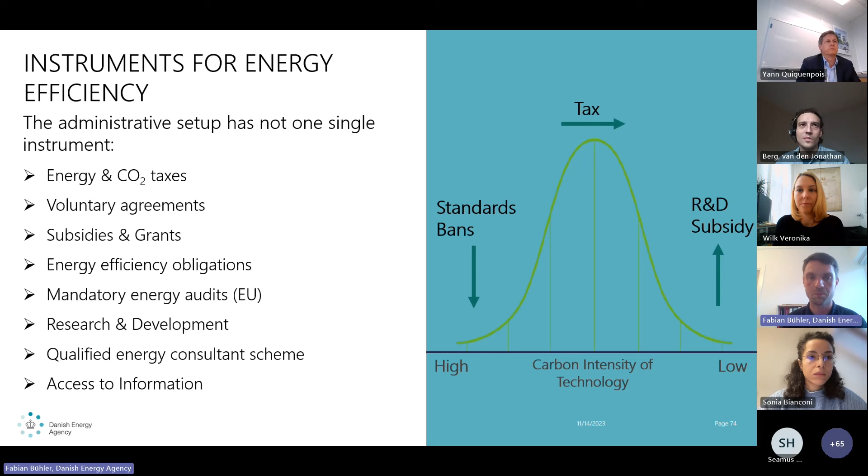Yeah, see, I'm running out of time.

I will skip the text slide, but show you the current policy elements in Denmark. So, of course, we are in the European Union, and all our actions are mandated also by the Energy Efficiency Directive, where we have mandatory energy audits for large industries. But in addition, Denmark will introduce from 2025 climate audits for all enterprises which have to do energy audits. And the climate audits have to look at the emissions of the company. And there will be also a requirement for large industries to have certified energy management systems after ISO 50001.

One important element is energy audits are very important in our opinion to create awareness of all the energy efficiency opportunities. However, you need other instruments to actually make industry implement these opportunities. And that's subsidies. We have a subsidy scheme for energy efficiency where industry can apply with getting up to 40% of the costs as a subsidy for their investment covered by the state.

And we have a voluntary agreement scheme for excess heat utilization. If industry utilizes excess heat, for example, with a heat pump for district heating, they can get tax exemptions if they document that their processes related to the waste heat generation are in an optimal condition, energy efficiency-wise. And then we have the phase out of petroleum coke.

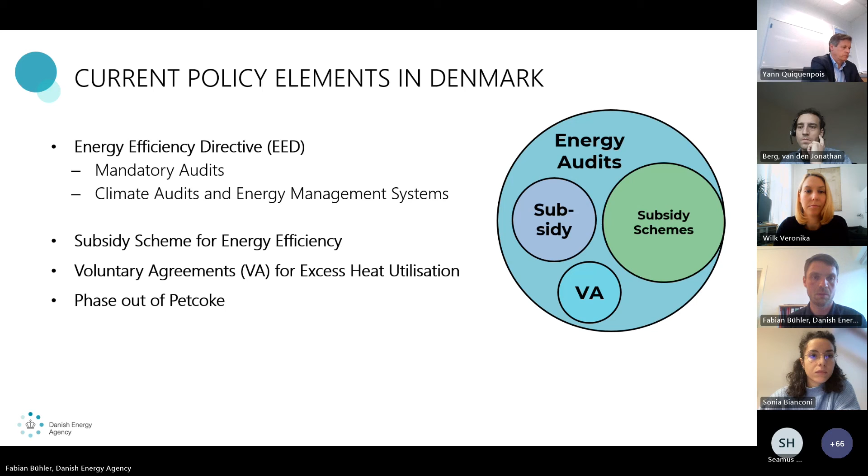Yes. So just a summary. The best practices we have in Denmark are based on the policies, but if we translate them into technical actions, we can see that energy efficiency still receives a lot of attention. We have conversion away from steam to hot water. Biogas production and utilization is very important, and heat pumps for process heating. Also district heat production based on industrial excess heat is something which is invested in quite significantly in Denmark.

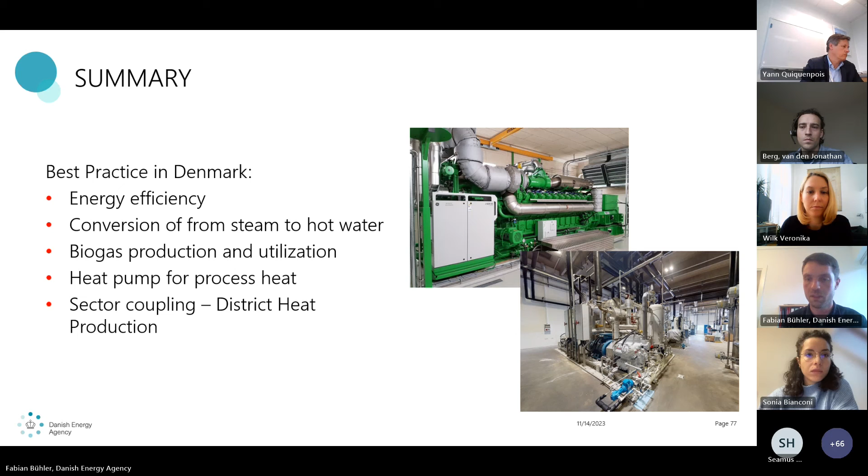Thanks a lot to you for this overview of the Danish energy policy and also the various instruments that are foreseen for energy efficiency. And I see that there are already some questions for you in the chat, so feel free to answer them while I introduce the next speakers, plural.

We have Padraig O'Reilly and Seamus Owen from the Technological University of the Shannon. So I'm going to introduce them quickly. So Padraig is a mechanical engineer with a master's in project management. He's been working in the building services engineering sector since 1994, and he has specialized in the areas of renewable heating systems since 2002, with a particular emphasis on the design and installation of heat pump systems. And in 2021, he was appointed as development manager for the Technological University of the Shannon.

And then we have Seamus Owen. Seamus is a mechanical engineer with a master's in renewable energy and energy management from the University of Limerick and Ulster. He has 25 years of experience in energy, education, and flexible learning environments. His research interests are focused on sustainable development, sustainable energy, and climate action. And he is also chair of directors of the Tipperary Energy Agency and Secretary General of FEDARENE, the European Federation of Agencies and Regions for Energy and the Environment.

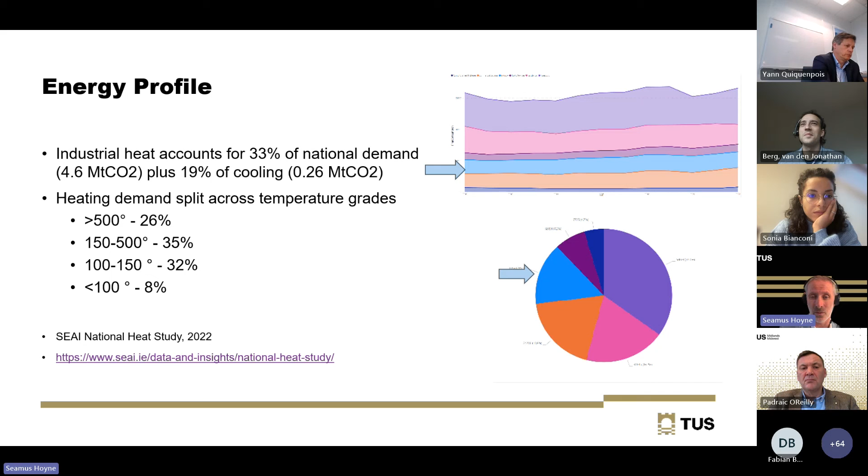So I just went, oops, apologies.

To maybe bring a different perspective to the other presentations, where we had a focus on global technology availability and the specifics in France, the Netherlands and Denmark, I'm going to come from an economic perspective. I was a member of the Shannon Estuary Economic Task Force, a government task force set up to look at the economic development of a region in Ireland, which essentially covers the Midwest region. For those who have been in Ireland, the Shannon River flows through the region, and that was the focus of the task force.

This region has a very large penetration of industry across multiple areas, and a significant portion of foreign direct investment. I chaired the onshore renewable energy group, and within our climate action plan in Ireland, there is a requirement for industry to reduce its CO2 emissions by 35% by 2030, so a significant challenge. So looking at opportunities for demand reduction, what could we do from an economic perspective to support those industries? Clearly a focus on decarbonisation of heat and increased penetration of renewables for electricity generation.

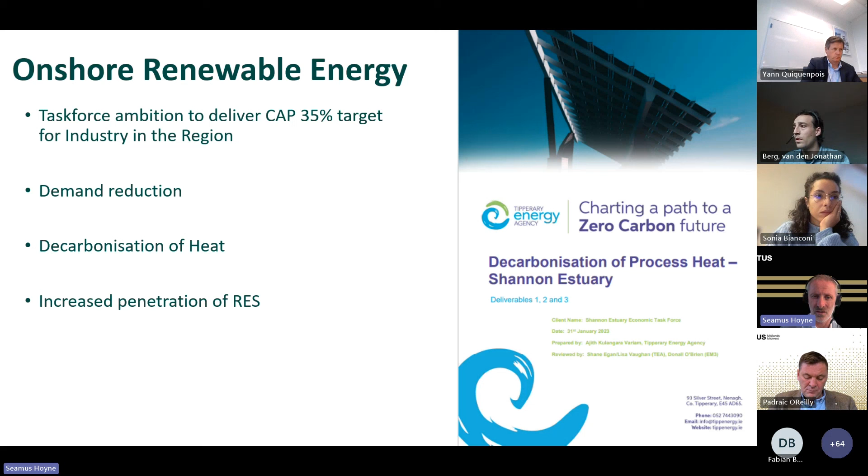So many of you may be aware that Ireland has been very successful in attracting foreign direct investment companies. So again, in the region, we worked with local industries, but also with foreign direct investment companies. So large global companies that are looking at decarbonisation. And clearly, some of their strategies are set from abroad, so from the headquarters that may be in the US or other parts of Europe.

And they have a clear decarbonisation agenda, but some of the decisions are being made outside of Ireland. But then we also worked with some of our Irish companies, their food and drinks industry. We also, again, have a very large dairy industry in Ireland. And they are trying to make plans 5 years ahead in terms of their decarbonisation.

And they're starting to look then at available technologies. And clearly, heat pumps, mechanical vapor recompression technologies are available on the market. They are looking at them and considering them. Direct electrification, biomass systems, and heat recovery solutions. So those are all in the space that they are looking at.

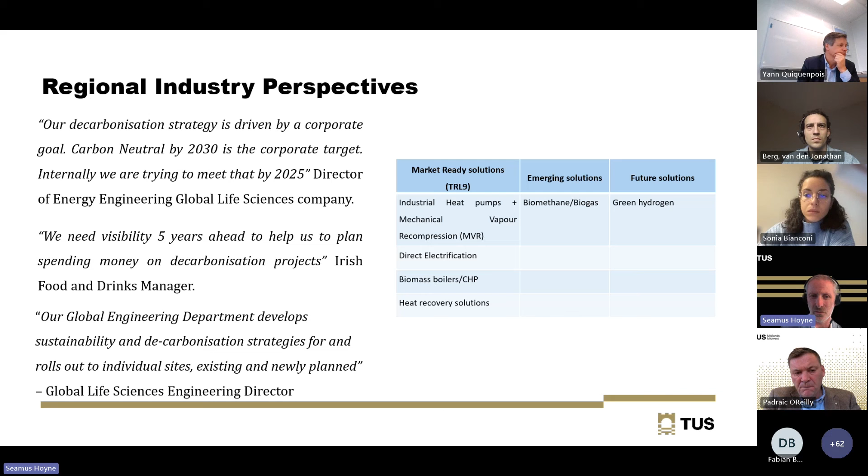When we compare ourselves to Denmark, for example, Fabian mentioned biogas as a core part of their solution. In Ireland, we have a completely underdeveloped biomethane and biogas industry. So while the technology is very viable, the sector is not there. And then discussions around green hydrogen emerging in the future. Part of the task force was a significant focus on floating offshore wind and developing complementary technologies in terms of hydrogen production, which may emerge as a solution into the future.

Part of the study then was to look at a number of different scenarios. And again, in the national heat study and our regional study, we looked at a range of different scenarios. And I've just presented one here looking at overall decarbonisation, and heat pumps was just one of the technology solutions that was considered. And again, looking at the heat profile, the temperature profiles across the sectors in the region, what's possible and what might be appropriate.

You can see on the base of the graphs here, heat pumps made some penetration, and MVR, based on the profile and the data available to us from engagement with industry. And this was a rapid progress, so where we would move very quickly to put in place the solutions, the supports, the subsidies, and the policy measures that would drive the technology. But you can see that's matched with some direct electrification. We do have some technologies where direct electrification makes immediate sense, mixed with biomass, some penetration, large penetration of biomethane into the future, and then balancing off with small components of fossil fuels.

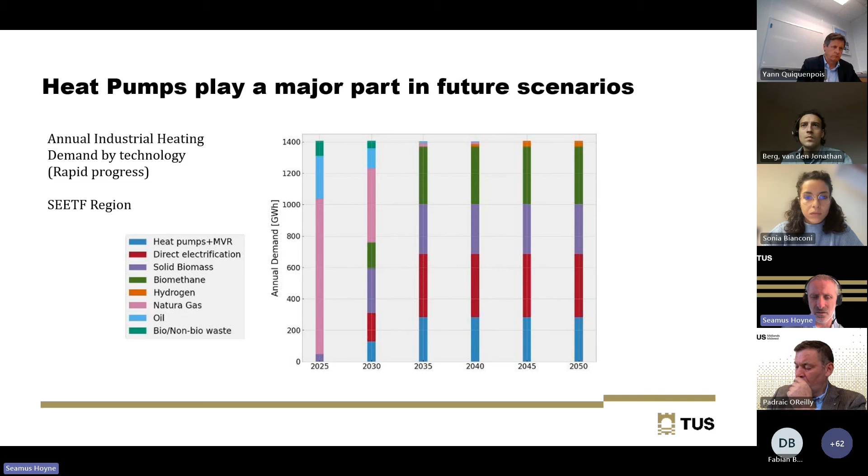A couple of the quick issues that arose from this discussion. Again, coming from the food industry in particular, a lot of the engineering and the plant managers in some of the sectors are challenged to release capital investment in decarbonisation projects, given the scale of investment. And when we compare that to the FDI sectors, FDI are making investment decisions based on global prices for investment and capital investment across all of the plants. So these companies are presented with some challenges.

I think the electricity price ratio disparity, if you noticed from Veronica's graph, Ireland was a big bright red colour in both of those scenarios that she presented. So it is a very big challenge to make a heat pump solution within the Irish context viable. And then the next two barriers are really related to available technologies and case studies in the Irish context and the knowledge and capacity base in Ireland. I think many of my previous speakers mentioned the skills and the knowledge, and the competency is significantly lacking, and that is a major issue in Ireland.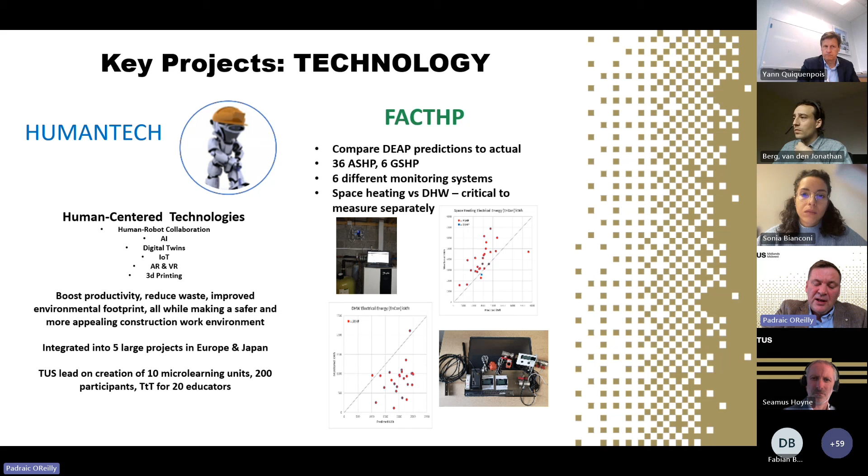And we found some very interesting findings. Even just a couple of graphs there, you can see that in one mode of operation, performance might have been very optimistically predicted, whereas in another mode of operation, the opposite was the case. So this kind of data-driven research is core to what we have been doing for a number of years, and I'll make a couple of observations about how that needs to be taken into account for industrial heat pumps as well.

So some of the key lessons that we've taken here: it goes without saying that design, installation and handover need to be of the highest standard, because heat pumps are coming into organizations where generally the staff are not familiar with how to operate these systems. So it's really important that the design has been well thought out, the installation has been carried out to the highest standards, but that the handover and the ongoing operation is very well understood.

This can be helped by ensuring and insisting that performance verification is included from the very outset, so that we have proper thermal and electrical monitoring with proper data logging. I think this is one of the key things. The graphs I'm showing there give an example of a heat pump system which had a lot of oversight in terms of engineers and quality assurance and installers.

And yet the top graph shows that the system was forced into a lot of on-off cycling. Its temperature never achieved the target temperature over an extended period of time. And that was purely down to inadequate handover and maybe over-optimistic commissioning. Whereas with the optimized approach, the lower graph was achieved, where the compressor output rose to a maximum, then modulated down, and eventually switched off, and at the top of the graph you can see that the target temperatures were achieved.

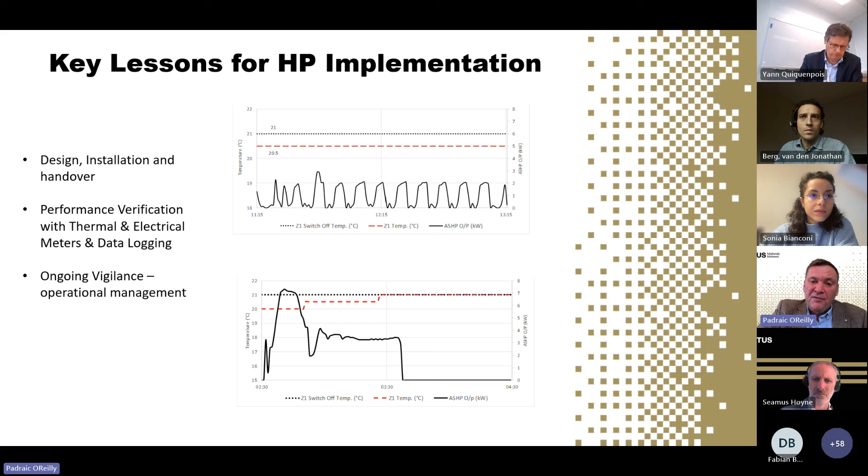So it's a very simple example from a residential scenario. But I think for heat pumps across the board, no matter how big they are, something like this will take place, that the operators and the owners will need to be aware of, making sure that they work properly. And that will require ongoing vigilance and operational management at a new level of skill that maybe doesn't already exist in those organizations. So when the installation companies leave the scene, who is going to make sure that this system continues to work?

From our Horizon 2020 project, Speedier, we focused on energy management in the manufacturing sector. We found that across countries, Ireland, Italy, Spain and Romania, the majority of companies at that stage had not carried out energy audits. Subsequently, working closely with a number of companies, we found that audits were done just as a box-ticking exercise, and measures were not really properly planned out or not implemented.

So the key thing there is that a culture of energy management needs to be driven from the top. It needs to come from top management to provide time for staff so that they can make the right analysis of their current operating situation to see if a heat pump is the right thing for them. And then when they move on to that, they need to be sure they have baseline data, that they know what the old system was consuming in terms of energy, and then monitoring and collecting new data to ensure that they're on the right track, that they continue to make energy improvements and that they maintain the system efficiencies that are designed into the system.

So that can either be done by in-house staff, or perhaps there's some kind of energy performance contract in place, in which case the host organization needs to be very clear about the contractor, if they're paying by kilowatt hour or paying by efficiency or whatever.

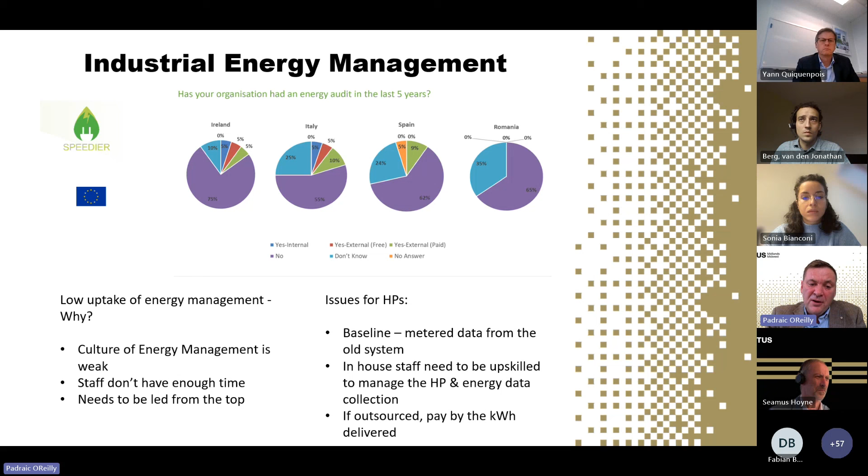So just to conclude then, a couple of examples from actually on the ground. There have been commercial-sized heat pumps, we would say, installed going back 20 years. They have had government support at a couple of times. The current support is called the Support Scheme for Renewable Heat, where heat pump systems can avail of a 30% capital grant. We've many examples around the country in the range of maybe 30 to 500 kilowatts, and not that many in the range above 500 kilowatts.

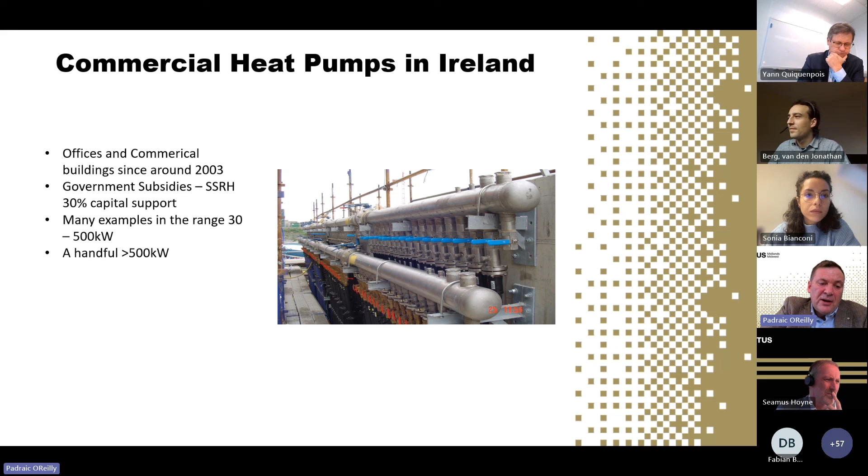In the years up to 2011 or 12, they were predominantly ground source, but in more recent years, air source technology has really taken over, and it's very suitable to our climate in Ireland for heating. In commercial buildings, we have requirements for cooling as well, but heating is the larger user over the year. And finally, when it comes to commercial or industrial heat pumps, there have been a lot of barriers that have held back growth in this sector. So for that reason, case studies are hard to come by.

Project owners who are willing to share specific details are also hard to come by. But there are some examples that we know of in the dairy sector, which is a very large energy user in the Irish economy, and also in the FDI, biotech or medical devices sector. And then also data centers: coupled with the growth in renewable electricity, we also have a large number of data centers. So there is a big emphasis on trying to recover waste heat from data centers.

And I just show an example of a project which is currently in the tendering stage and will be installed next year for a manufacturing plant. If you just consider, on the right hand side you have the cooling headers, and on the bottom right hand side you have the heating headers. Heating was looked after by gas boilers and a CHP plant, whereas the cooling load, which is critical to the processes, was looked after by two separate air-cooled chiller systems.

So in this reconfiguration, they have taken out the CHP and they have included some new water-to-water chillers here to take over half of the cooling load. And in between the heating and cooling side, they have installed a water-to-water heat pump. So they will basically use that to recover as much waste heat that would otherwise be dumped to the environment and put it back into the heating side, where it can be topped up by gas boilers if necessary.

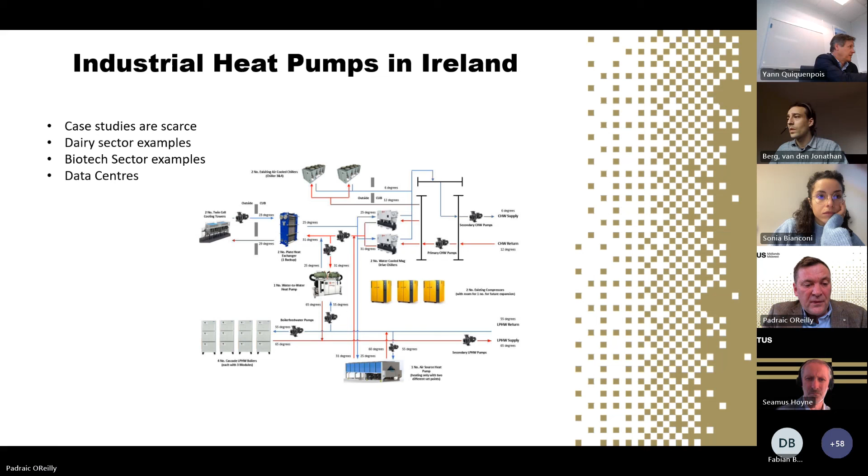Thank you, Padraic and Seamus, for this very interesting presentation. It was actually interesting to see, Seamus, the projection of the deployment of industrial heat pumps from now to 2050. And I really appreciated the focus on skills from Padraic, because it was a topic that was mentioned by almost all of the speakers. So it's important also to give visibility to projects that are working to promote skills in the sector.